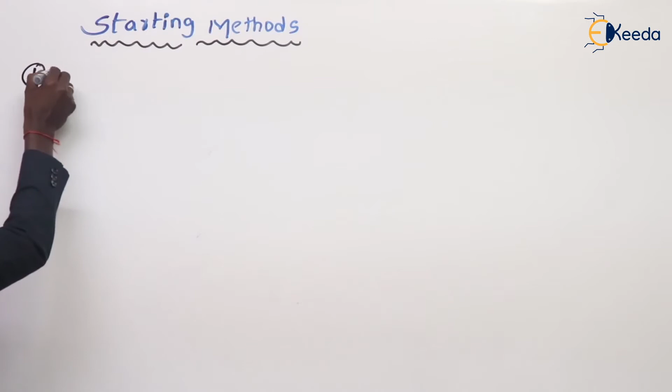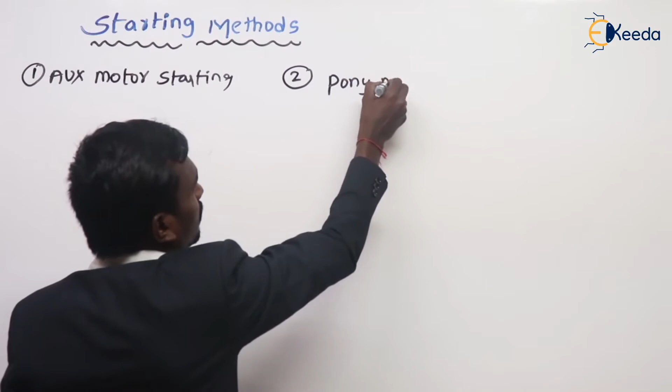In that we have many methods. The first one is auxiliary motor starting. This is the first method. And second method, pony motor starting. Be careful, this is not SONY, this is PONY. Pony motor starting. And next one, damper winding starting.

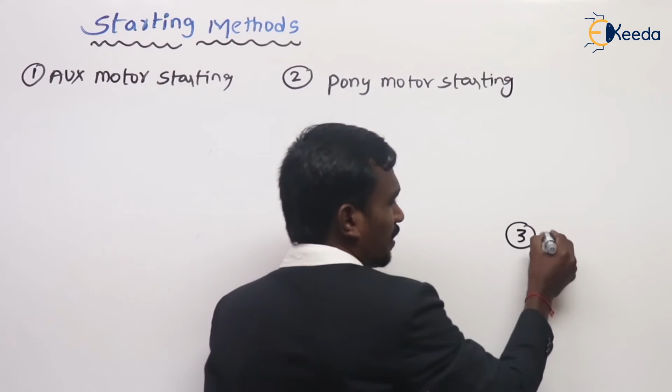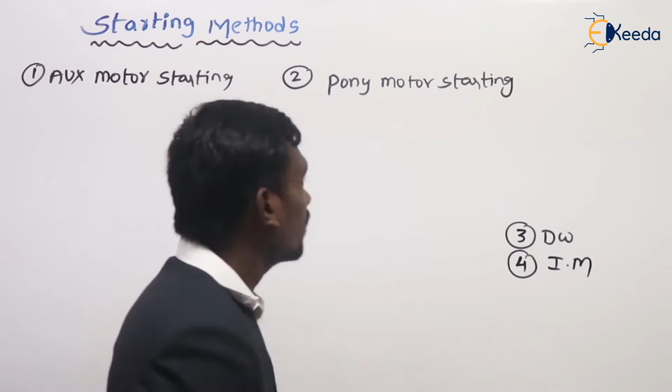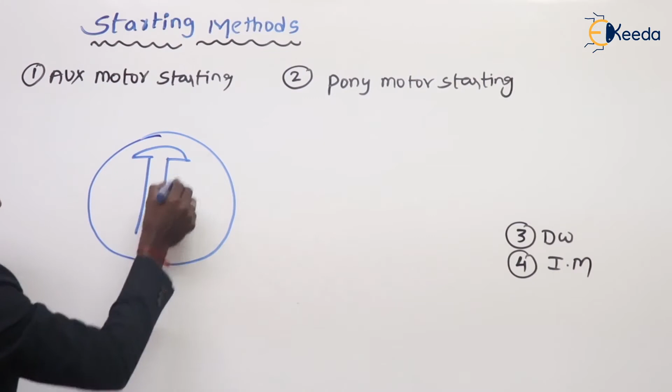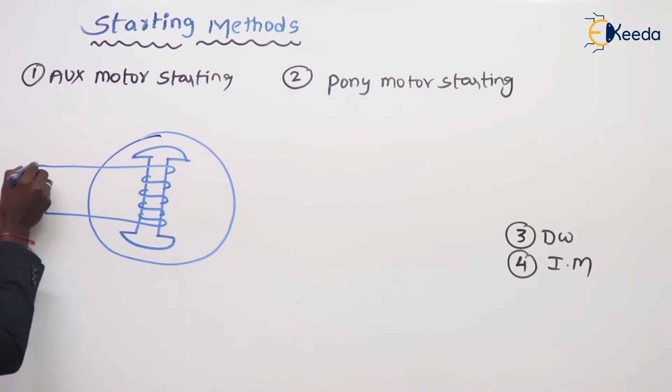Let's see, actually my synchronous motor is like this. For easy understanding, I am taking a two-pole machine, but generally two poles are not possible for a synchronous motor because this is a salient pole type. In salient pole, minimum is 6, maximum is 120 poles, you know that. So whatever, let's see here.

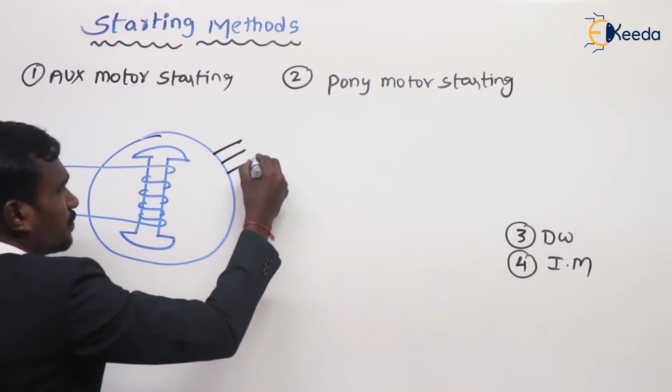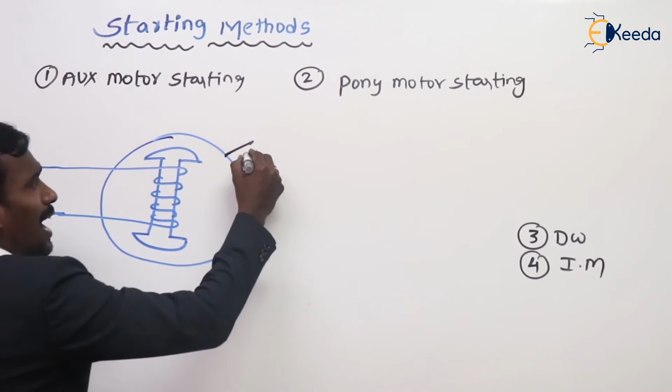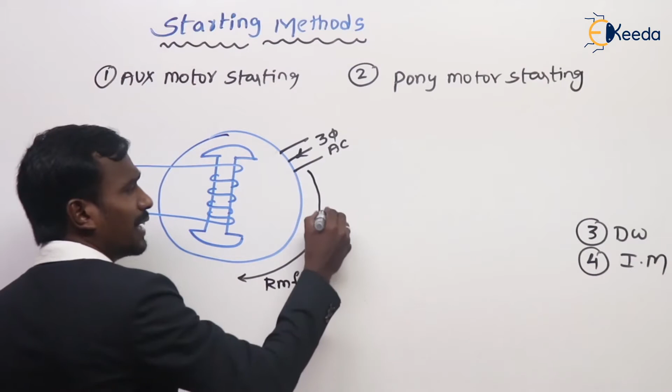I am going to start my synchronous motor. For that, listen carefully to what I am doing here. First of all, I am giving 3-phase AC supply to the armature. When 3-phase AC supply is given to the armature, it will produce a rotating magnetic field which rotates in clockwise direction with the synchronous speed. Yes or no? Here north pole is created and here south pole is created. These poles are rotating in this way.

Okay. During starting condition, this field winding should be shorted with a resistance, because if it is left like that, this flux may link with the rotor conductors, because the rotor is now stationary and the field is at synchronous speed, so we have a relative motion.

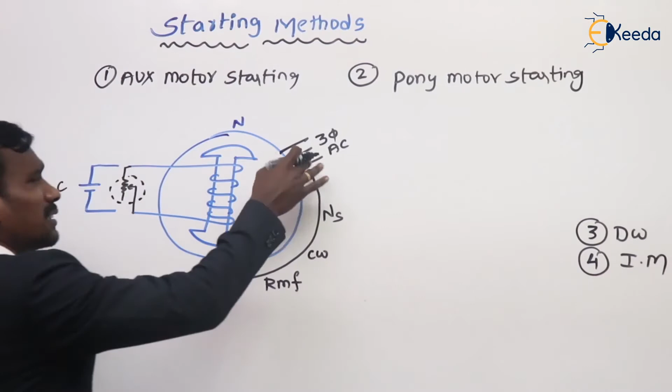So EMF will be induced in the field winding, and large currents flow in the field winding, which damages the field winding. To avoid the large currents induced in the rotor, we are placing a rheostat or resistance across the field winding. Okay, so during starting condition I have given 3-phase AC supply and connected the field winding to a resistor.

Now this rotor should be connected to an auxiliary motor which has constant speed. It should have constant speed and rotate this rotor in the same direction with the same speed as the magnetic field. That's why we have to take a constant speed motor here. Can you tell me what is the constant speed motor?

Yeah, exactly. Here DC shunt motor is more preferable. Here the auxiliary motor is nothing but a DC shunt motor. Because this is a perfectly constant speed motor, at synchronous speed, we are rotating this rotor in the same direction with the same speed.

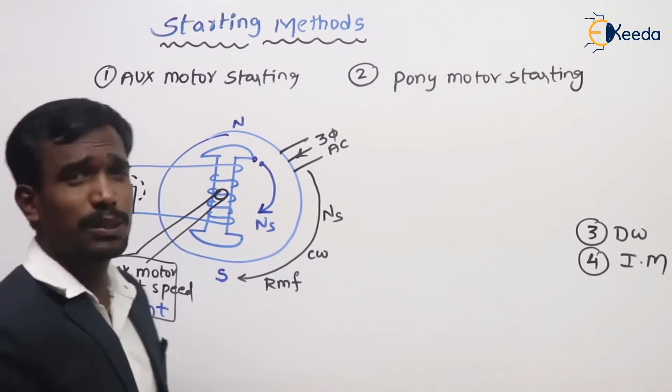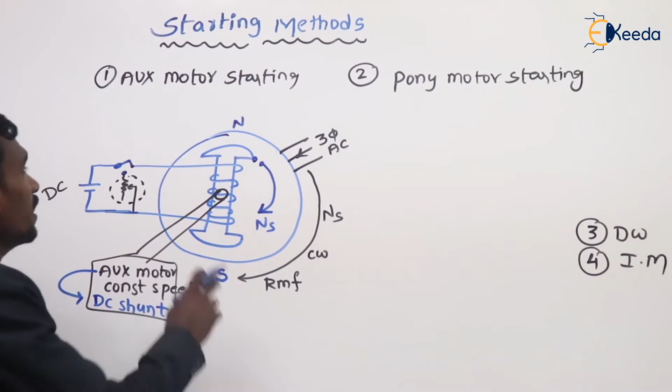Now this field winding rotates at synchronous speed and my field also rotates at synchronous speed. What is the relative motion between these rotor conductors and the field? Zero. Now we can remove this switch. Actually, we have a switch. Remove this switch and connect it to a DC supply. This field winding is now excited.

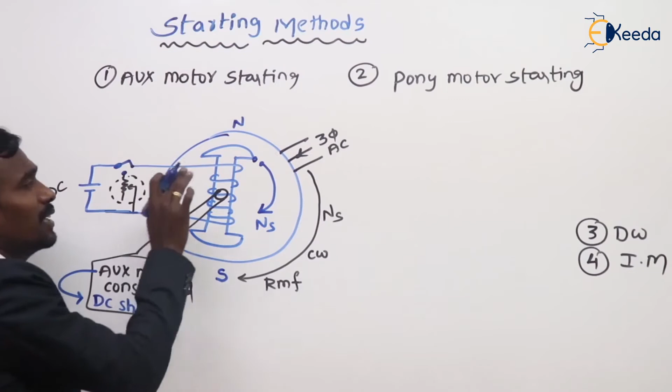My rotor is already rotating at synchronous speed by using this auxiliary motor, and the magnetic field is also rotating at synchronous speed. Now I am giving DC supply to the field winding. For example, here I got the south pole and north pole. It should be like that. Here, the rotor poles and stator poles are both rotating with the same speed in the same direction.

After a particular time, what happens here? What will exist between unlike poles? Attractive force will exist. So these unlike poles attract each other. After some time, this attractive force is converted into magnetic locking. This force is nothing but the magnetic locking.

So when these rotor poles are magnetically locked with the stator poles, my rotor rotates at synchronous speed even though the auxiliary motor is disconnected. Of course, you can disconnect the auxiliary motor after magnetic locking. So the synchronous motor works on magnetic locking.

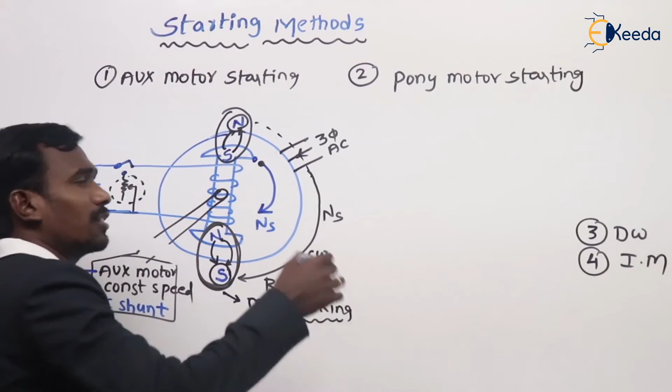Listen carefully. Here the rotor poles are magnetically locked with the stator poles. The stator poles are rotating in clockwise direction with synchronous speed. That's why our rotor poles also rotate at synchronous speed in clockwise direction. This is simply the auxiliary motor starting.

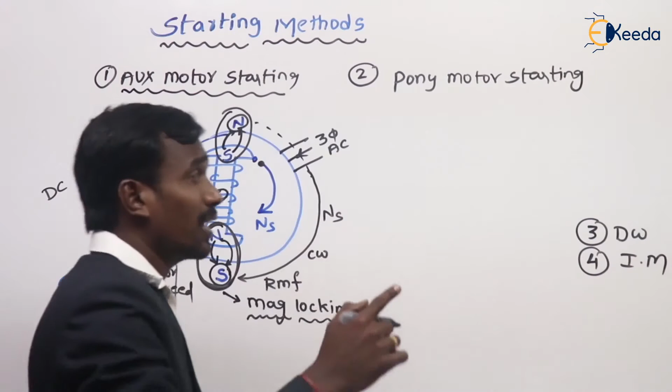Here the auxiliary motor is nothing but a DC shunt motor. Are you clear? Before starting the machine, we should connect the field to a resistor. But when the rotor is rotating at synchronous speed, this resistor is disconnected and the field is connected to an exciter, which is a DC shunt generator. Right. This is the first starting method, auxiliary motor starting. Next, second starting method, pony motor starting.

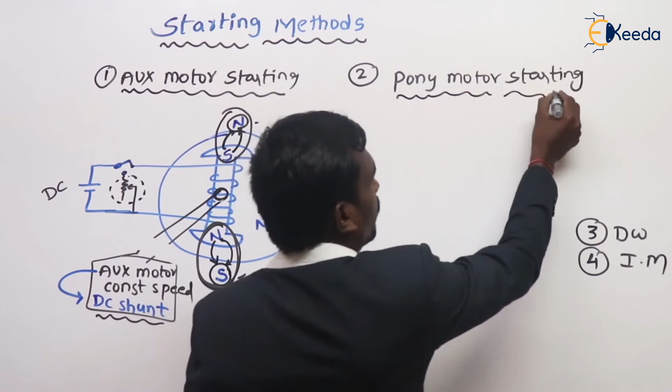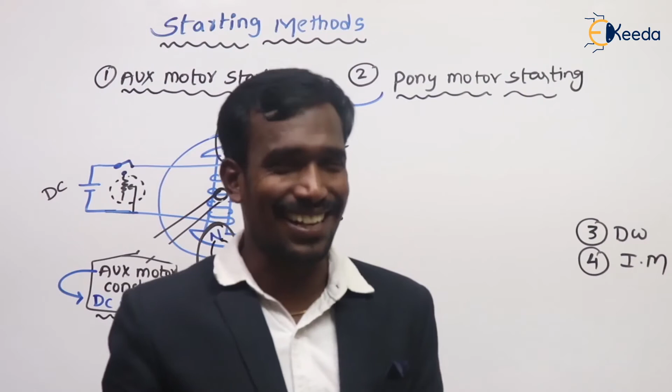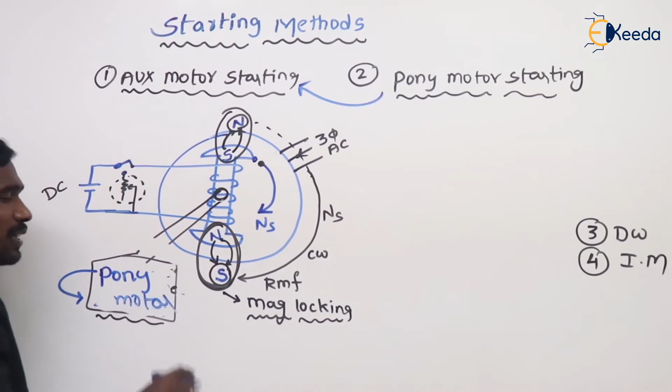What happened here? The pony motor starting is 100% similar to the auxiliary motor starting. What is that? 100% similar to the auxiliary motor starting. The only change, so don't say 100%, 99% similar. The only change is that here we are not using the auxiliary motor, not the DC shunt motor. What are we using? We are using a pony motor here. This is the only change. So what are we doing?

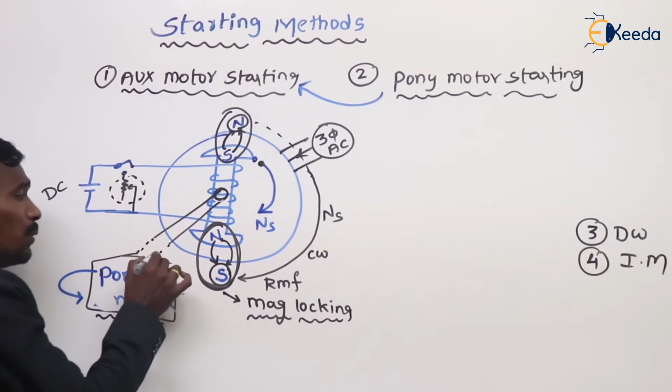Take the synchronous motor and give a three-phase AC supply to the stator. Then a magnetic field is created which rotates in the clockwise direction with synchronous speed, and connect this field winding to the resistor at the starting condition. Then this rotor is connected to the pony motor. This pony motor rotates the rotor in the same direction with the same speed. Then this is disconnected and DC supply is given to the field winding.

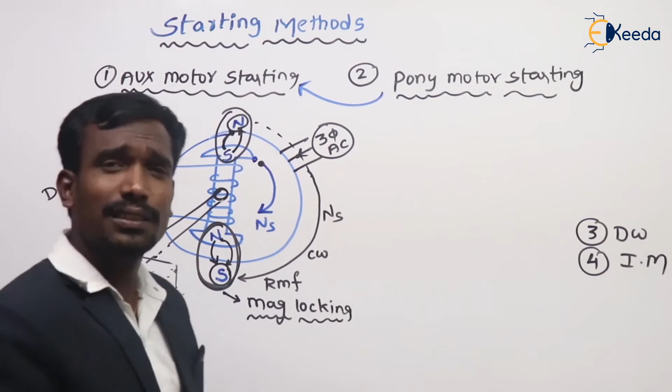Then poles are created. After some time, this attractive force is converted into magnetic locking. Then, even though the pony motor is disconnected, the rotor rotates at synchronous speed. Everything is the same, the story. But here the DC shunt motor is replaced by the pony motor. Sir, what is that pony motor? Here, the pony motor is nothing but a small induction motor.

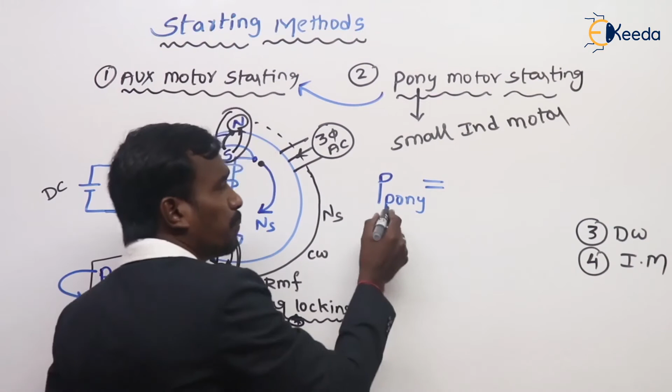Why are we choosing only an induction motor? Its speed may be nearly equal to synchronous speed. We can make it like that. So a small induction motor. Can you tell me how many poles are there in this pony motor? The poles of the pony motor equal the poles of the main motor, the main motor being the synchronous motor, minus 2. This is a very important point. In this pony motor, the poles are 2 less than the main motor.

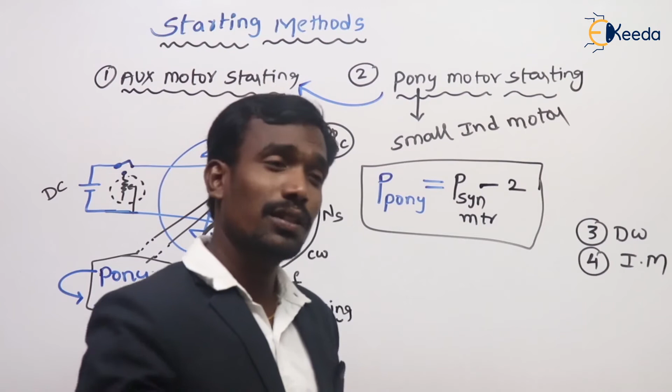Now some fellows have a very important doubt. Sir, if my synchronous motor has 2 poles, then what is the situation? If you ask this question, they will give you a Nobel Prize for asking, and me for listening. Both you and me are eligible for the Nobel Prize.

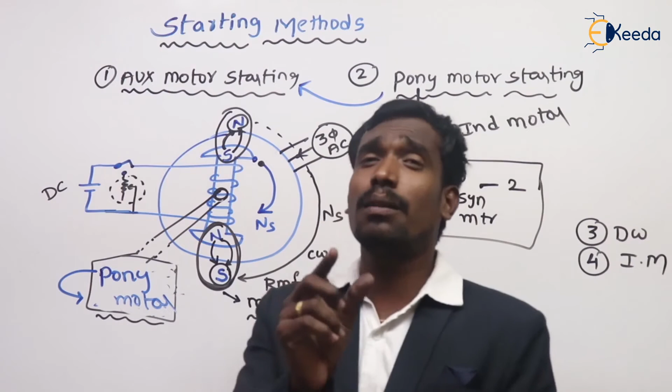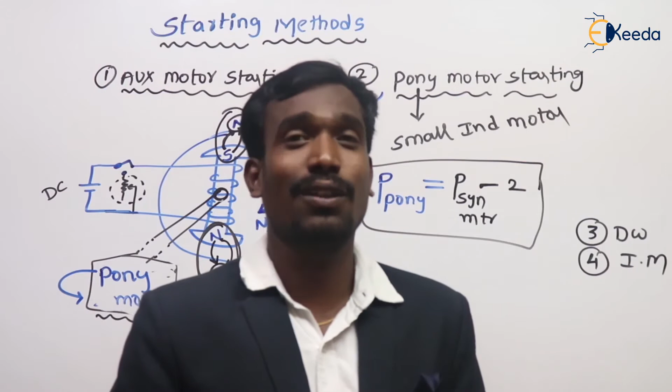Okay, I have told you many times, generally 90% of motors are salient pole type. In salient pole, the minimum is 6. 2 is out of the question. The minimum is 6 poles. But generally, we use 10 to 20 poles. I have told you many times. Don't ask anyone, sir, if in a synchronous motor we use 2 poles. They will laugh. Okay, right. So, pony motor, sir, why should it be 2 less?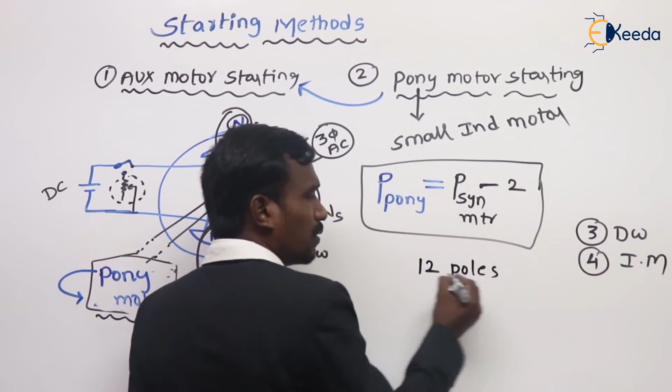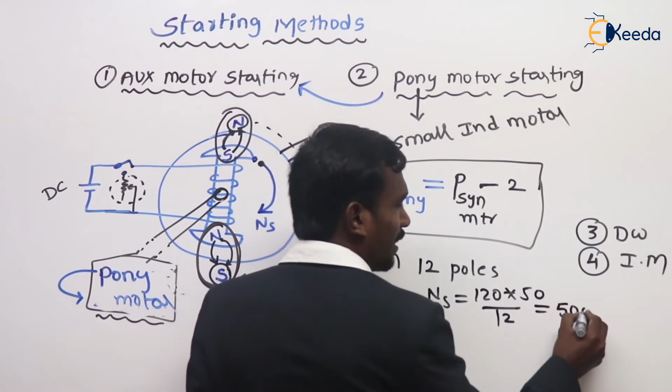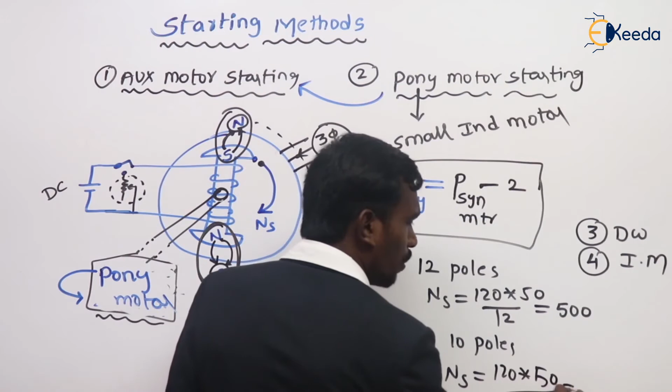For example, in our synchronous motor, I have 12 poles. This is the synchronous motor. For 12 poles, what is the synchronous speed? 120F/P, so the speed is 500 RPM. In the pony motor, I have 10 poles. For 10 poles, what is the synchronous speed? 120F/P, so it is 600 RPM. This is 500, this is 600.

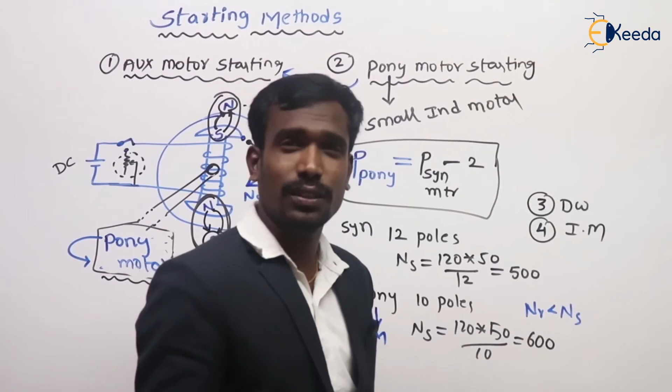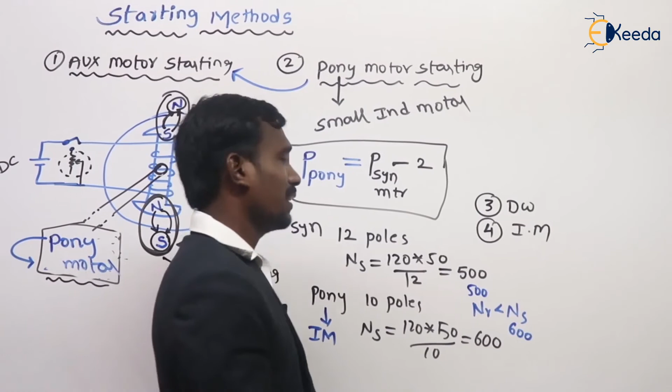But this is an induction motor. In an induction motor, the rotor speed is always less than synchronous speed, not equal to it. So what is less than 600? 500. We can make it run at 500. So if both are rotating at 500, then magnetic locking is easy, because the induction motor is rotating at 500 and the magnetic field is also rotating at 500 synchronous speed. Easy to synchronize, easy to magnetize.

Sir, what happens if you take 12 poles for the pony motor? Then the synchronous speed of the induction motor is 500, but the rotor always rotates at less than synchronous speed, for example, 450. Here the rotor is rotating at 450, but the magnetic field is rotating at 500. Is magnetic locking possible?

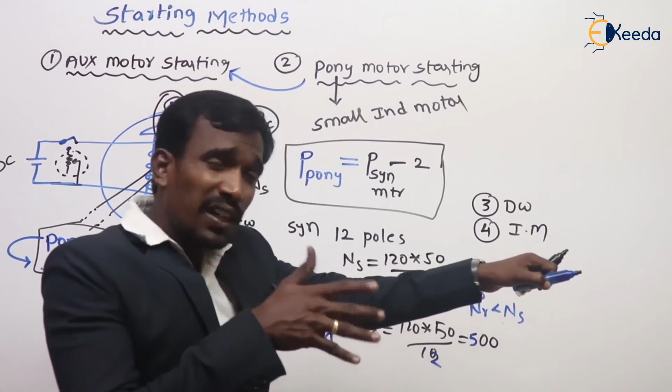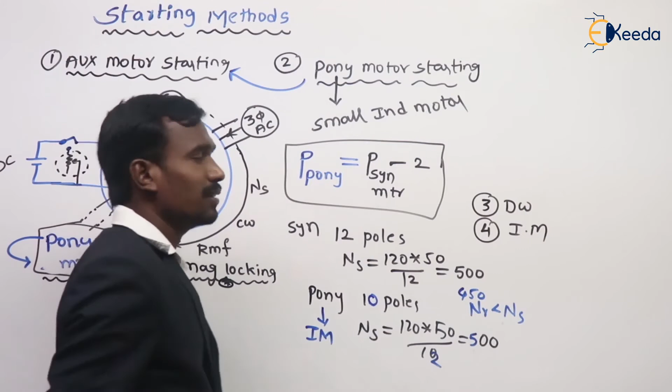If the rotor is sharply trying to catch the magnetic field, the machine will be damaged. Don't do that. So we should take 10 poles here, 2 less than the main machine. This is simply about the pony motor and auxiliary motor, very simple.

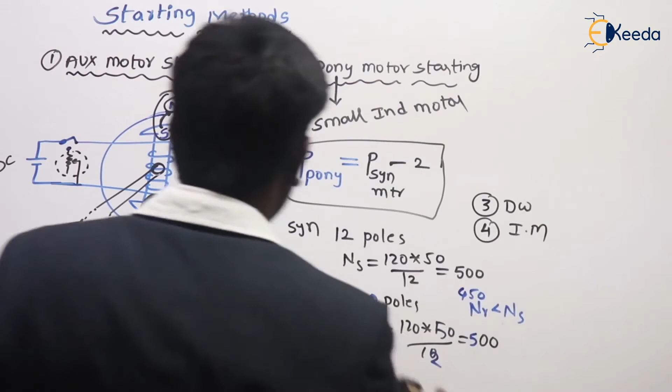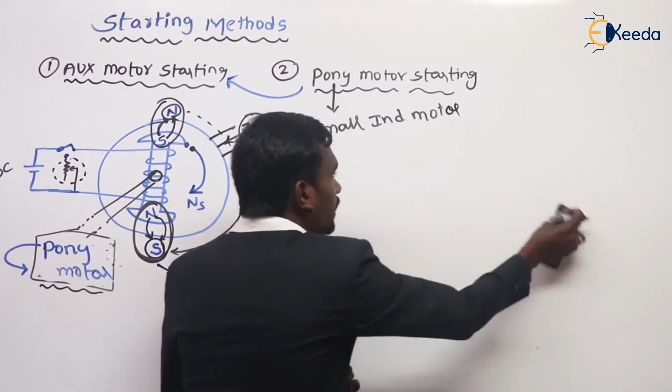Now we have the third and fourth ones, damper winding starting and induction motor starting. Are you okay? Right? So let's see damper winding starting. Third case. What is the third case? The third starting method is damper winding starting.

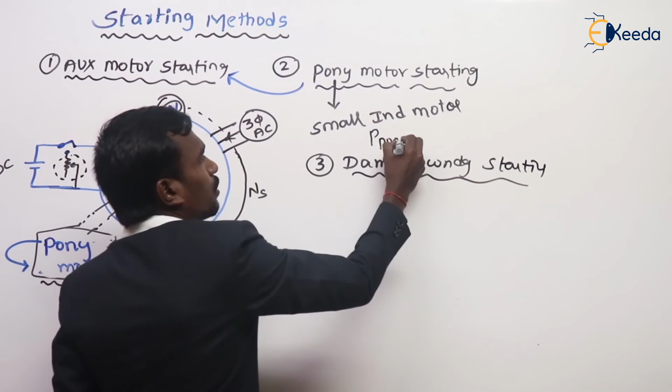You know, the poles of the pony motor is equal to the poles of the main motor minus 2. You should remember that point. Next one. I told you already, generally the damper winding is used for salient pole motors only. In cylindrical motors, the rotor itself acts as a damper winding.

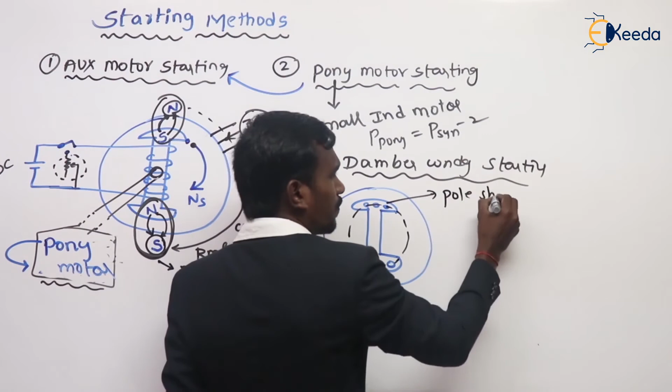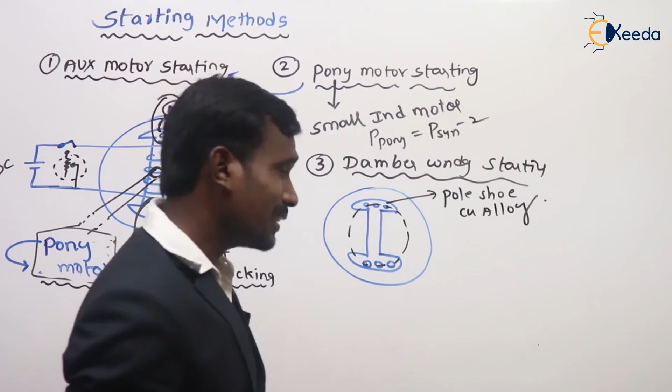This damper winding is a short-circuited winding. This damper winding is placed under pole shoes. This damper winding is made up of copper alloy, brass or bronze, etc. like that. I gave you already. What I told you, the damper winding is placed under pole shoes. This is a short-circuited winding, and this is made up of high resistive materials like a copper alloy, right?

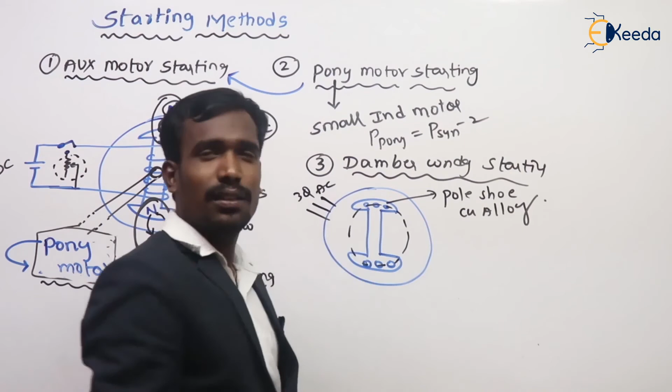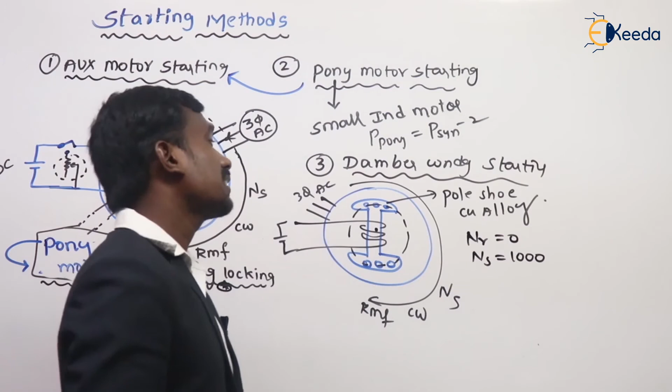When the three-phase AC supply is given to our winding, then it produces a rotating magnetic field which rotates in clockwise direction with a synchronous speed. But here the rotor has not started rotation up to now. Of course, we have a field winding, but this is open circuited, not given now. So at zero speed, here NR is equal to 0, but NS is equal to, for example, 1000 RPM. There is a change in speed. Nothing but there is a hunting.

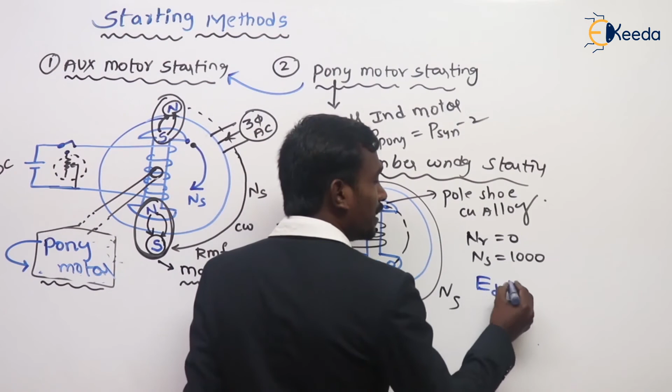If there is a hunting, what happens? Then the damping EMF will be produced in the damper winding. Then this damping EMF finally produces the damping torque. I told you already. This is case 2, NR less than NS. This damping torque, what happens, sir? It increases the rotor speed up to synchronous speed. Okay, this increases the rotor speed up to synchronous speed.

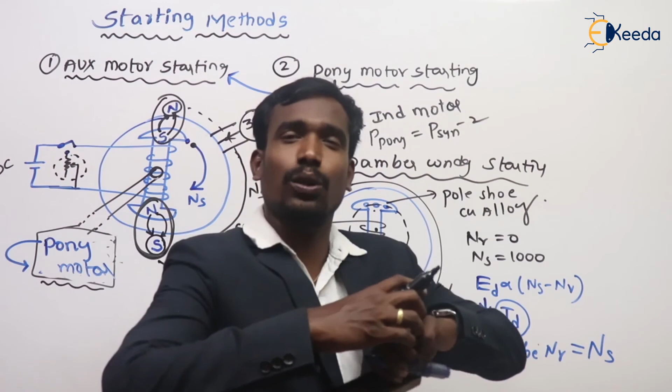When it reaches synchronous speed, then the damper winding produces no torque. At that condition, we have to give the DC supply, and here poles are created. After some time, magnetic locking will develop. Due to magnetic locking, the rotor rotates at synchronous speed. Up to magnetic locking, the damper winding is in action. When the magnetic locking is there, the rotor speed is equal to synchronous speed, then the damper winding produces zero torque, it will go to rest position.

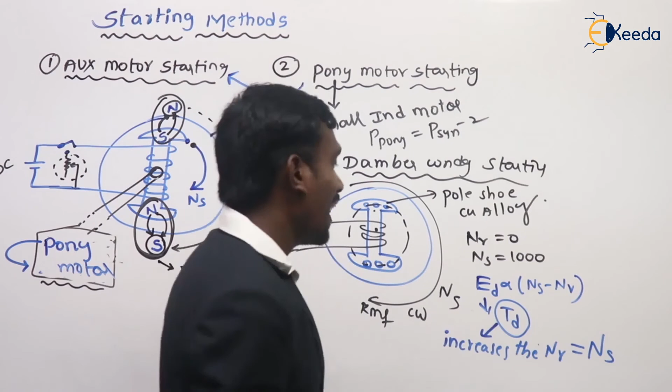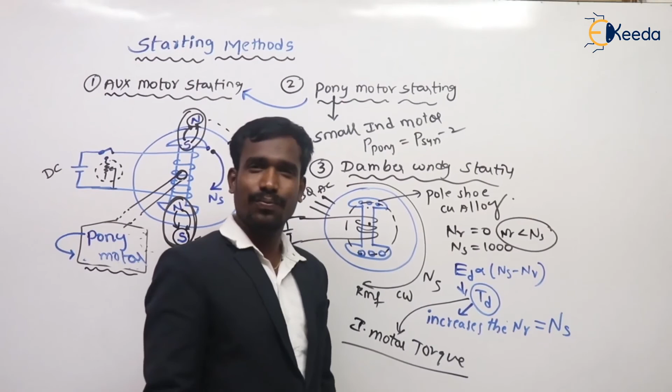So in synchronous motor, the damper winding is used to eliminate hunting and for starting purpose. Here two purposes. But in alternator, the damper winding is used to eliminate hunting, that's it. And tell me, this damping torque is called, here NR is less than NS. When NR is less than NS, it produces damping torque which increases the rotor speed up to synchronous speed. This damping torque is called induction motor torque. I told you already in alternators. This is simply about the damper winding starting. This is the most preferable method of starting for synchronous motor.

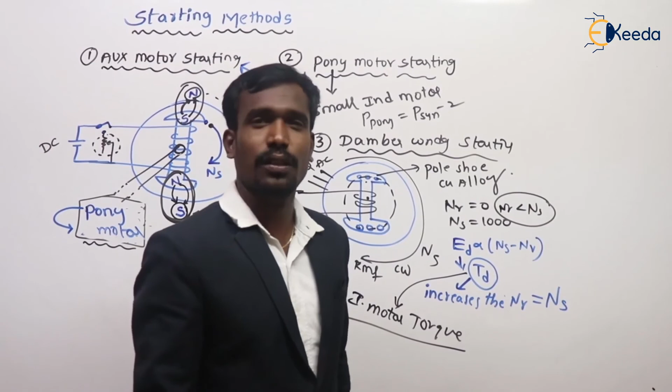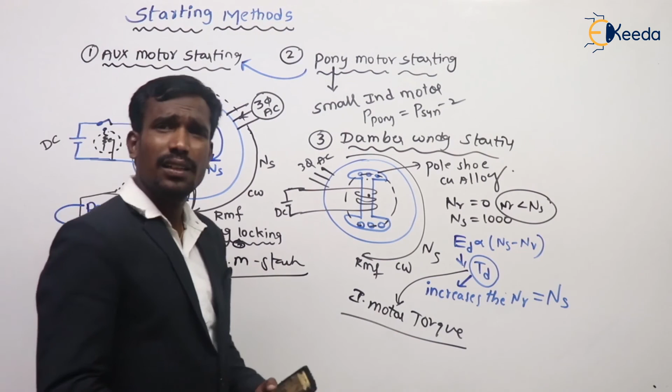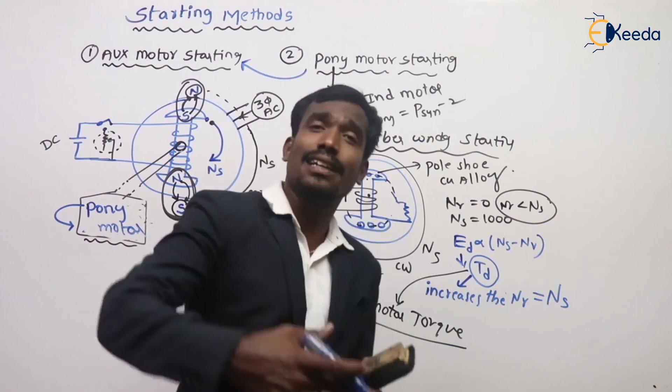Next, fourth one is there. What is that fourth one? Induction motor starting. In this, generally the synchronous motor is started as a slip ring induction motor by connecting extra resistance to the rotor. We know in slip ring induction motor we can increase the starting torque by adding extra resistance in series to the rotor, right? Here also by adding extra resistance in series to this damper winding or this rotor winding.

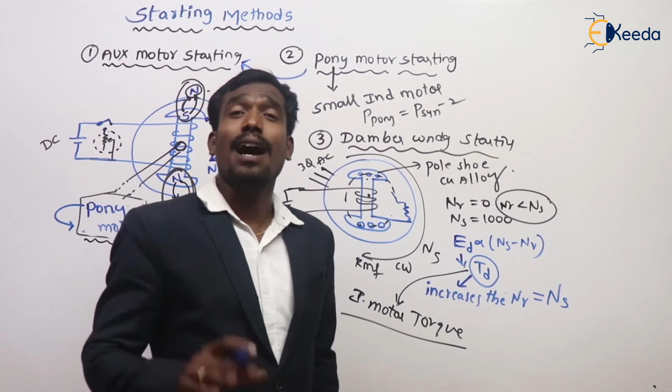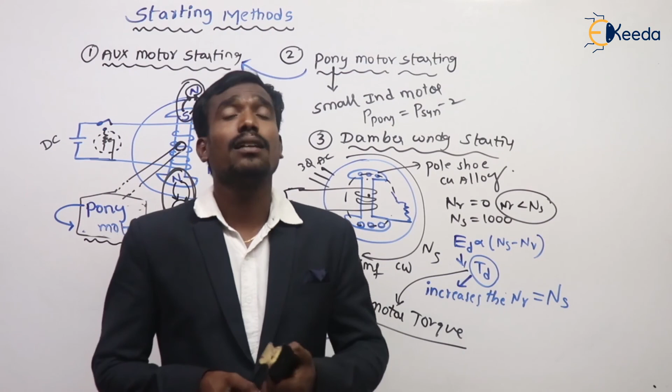Then what happens? When the extra resistance increases, the starting torque increases, then automatically the rotor rotates at nearly synchronous speed. After some time, magnetic locking will take place. Then after, the machine acts as a synchronous motor. So, in induction motor starting, initially the motor starts as a slip ring induction motor. And after magnetic locking, the motor runs as a synchronous motor. This is simply the induction motor starting.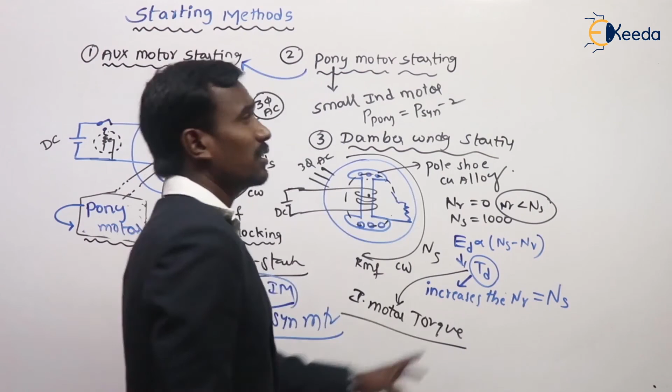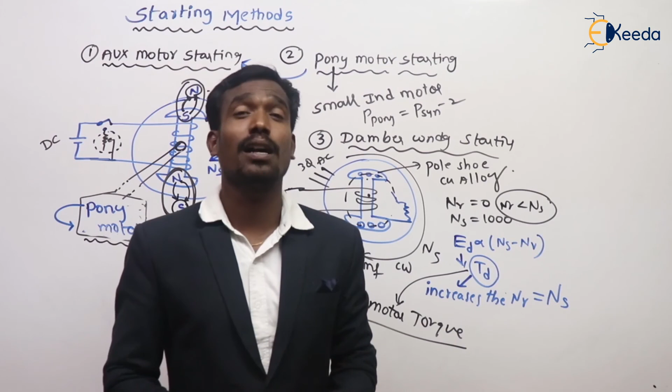These are the starting methods of my synchronous motor. In this, damper winding starting is most preferable. If you use auxiliary motor starting, we should buy the DC shunt motor, which is costly. And in pony motor starting, the induction motor is costly, but damper winding is very easy, and the additional advantage is that it eliminates the hunting. These are the starting methods of synchronous motor. If you start it once, then it will rotate at synchronous speed. That's why we are using it enormously in our industry for constant speed applications. Okay, thank you.